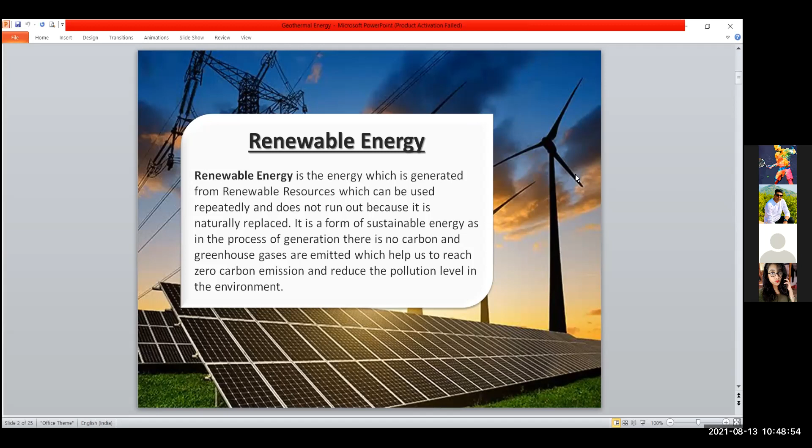Now, the question is why renewable energy? Renewable energy is the need of the future as we all know huge amounts of carbon oxides are emitted into the environment during the process of generation of electricity, causing a misbalance in the biosphere which results in climate change and nature degradation. So it is needed to switch over to a technology that helps us reduce these carbon emissions, and this is only possible with the adaptation of renewable energy over traditional carbon-based energy generation methods. It also helps us reduce dependency on fossil fuels.

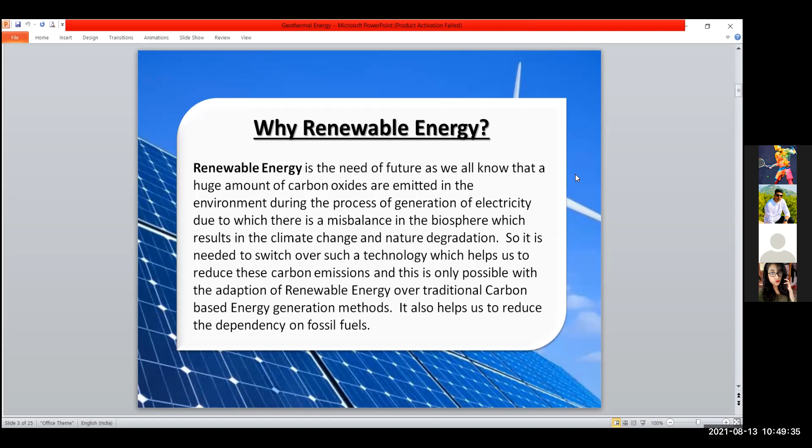Now, types of renewable energy will be carried by our teammate, Srigorai.

Good morning, sir. My topic is types of renewable energy, solar energy. Solar energy is a transformation of heat, energy that comes from the sun. Solar energy is radiant light and heat from the sun that is harnessed using a range of evolving technologies such as solar heating, photovoltaic, and solar thermal energy to generate electricity. It is utilized by many means like solar street lights, solar cells, solar cookers, which convert solar energy into desired forms like heat and electricity.

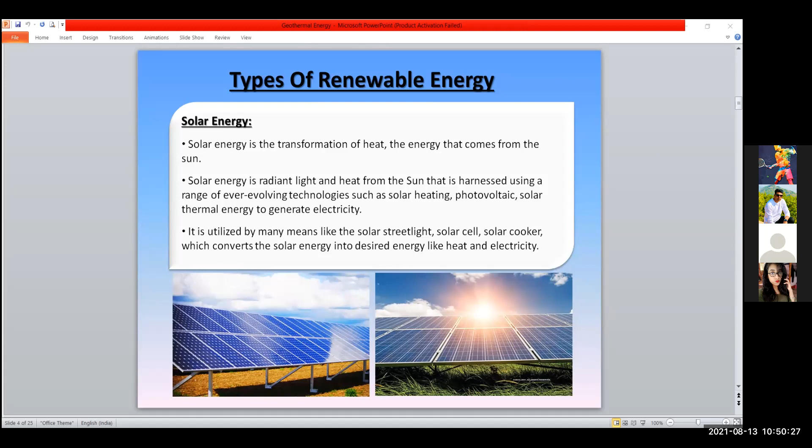Next is wind energy. Wind energy describes the process by which wind is used to generate electricity. Wind turbines convert the kinetic energy in wind into mechanical power. There are certain places in the world where wind intensity is high, providing an opportunity to set up windmills having a turbine to generate electricity.

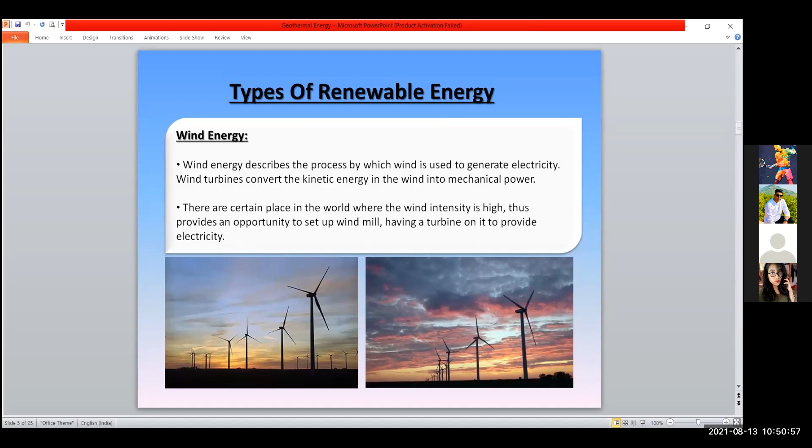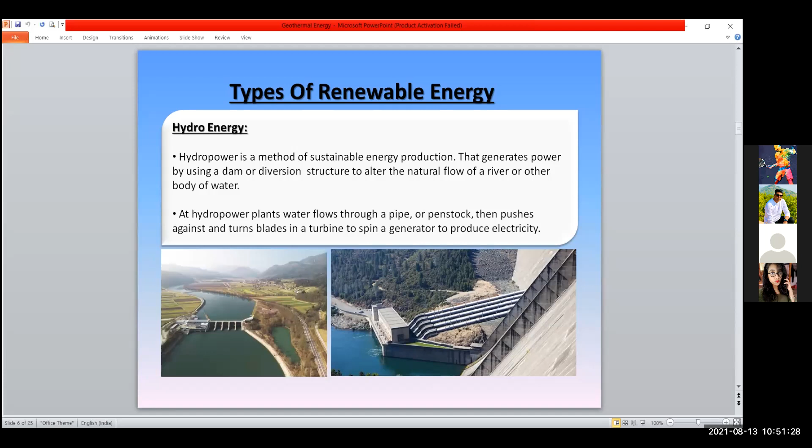Next is hydropower energy. Hydropower is a method of sustainable energy production that generates power by using a dam or diversion structure to alter the natural flow of a river or other body of water. At hydropower plants, water flows through a pipe or penstock that pushes against and turns blades in a turbine to spin a generator and produce electricity.

Next is geothermal energy. Geothermal energy is heat derived from the subsurface of the earth; water and steam carry the geothermal energy to the earth's surface. Depending on its characteristics, geothermal energy can be used for heating and cooling, or be harnessed to generate clean electricity.

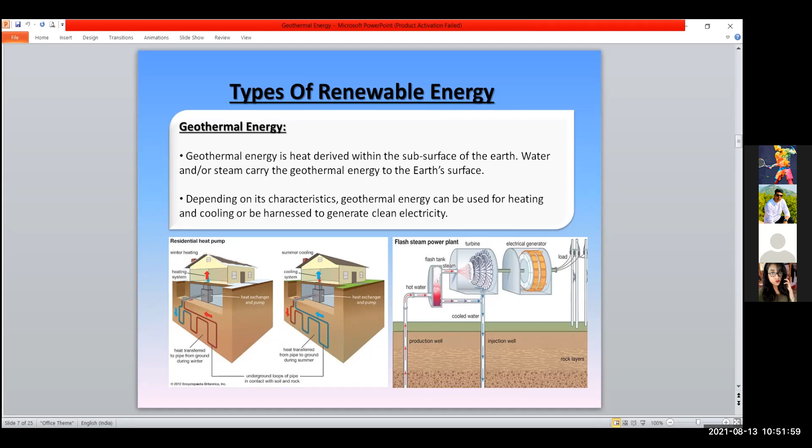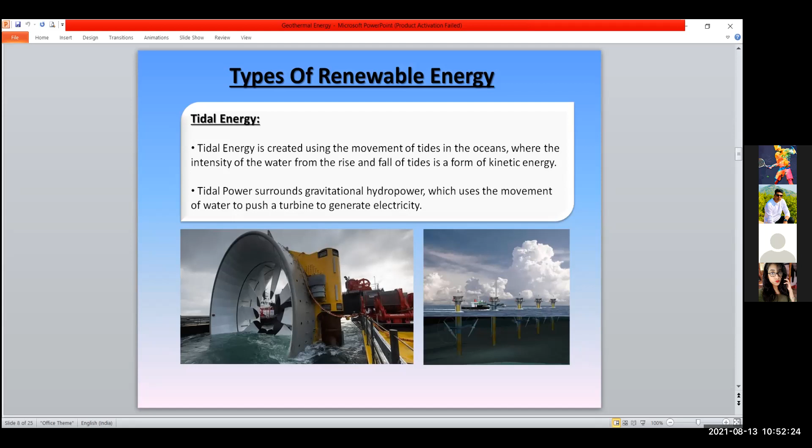Next is tidal energy. Tidal energy is created using the movement of tides in the oceans, where the intensity of water from the rise and fall of tides is a form of kinetic energy. Tidal power surrounds gravitational hydropower, which uses the movement of water to push a turbine to generate energy.

Next is biomass energy. Biomass contains stored chemical energy from the sun. Plants produce biomass through photosynthesis. Biomass can be burned directly for heat or converted into renewable liquid or gaseous fuels through various processes. Electricity generation from biomass in most cases is produced by direct combustion. Biomass is burned in a boiler to produce high pressure steam. This steam flows over a series of turbine blades, causing them to rotate, and the rotation of the turbine drives the generator to produce electricity.

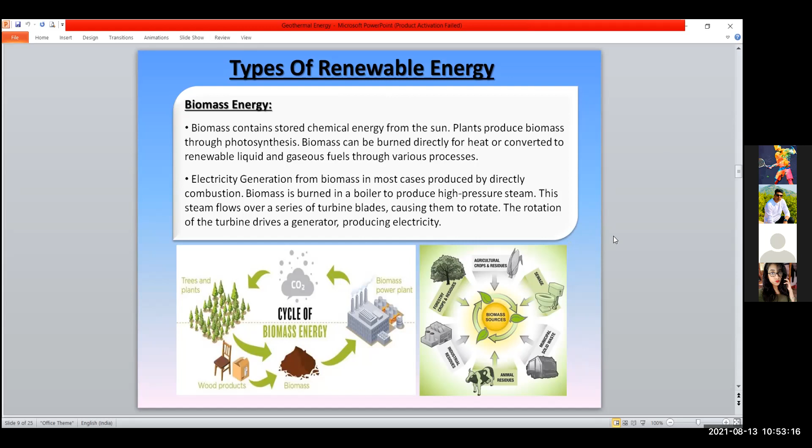Now next, again, we come to geothermal energy. Geothermal energy is an inexhaustible source of energy as it is available from the earth's crust. It is a renewable energy source that doesn't need any fuel to generate electricity, and the emissions connected with geothermal energy are very low and negligible compared to emissions from burning fossil fuels. Geothermal energy is gaining importance as an alternate source of energy.

India's power production is based on coal due to the availability of huge coal reserves in our country. Excessive use of these fossil fuels will have a deteriorating effect on the quality of human life. This is the time to launch geothermal energy resource programs in a big way to implement clean energy generation. Our country has enormous resources lying untapped, so we have to know the technology sources to generate power and support various industries using geothermal energy. There is more than one type of geothermal energy: one is low temperature water, and the other is high temperature resources.

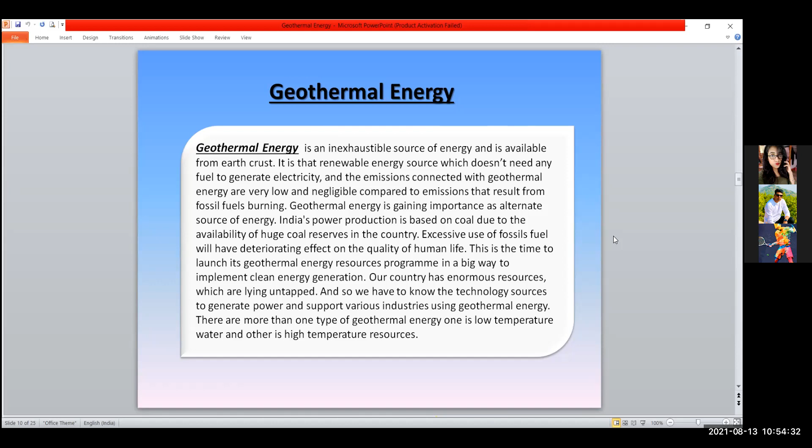Now, some brief history about geothermal energy. The use of Earth's internal crust heat as an energy source began in the early period of the 20th century. Electricity was generated for the first time from geothermal steam in Italy in 1904.

The spread of the use of geothermal energy to other parts of the world had been rather slow during the first half of the 20th century, mostly confined to Italy. The utilization of this alternate source of energy has increased rapidly during the last 4 decades. Development of geothermal energy registered the maximum growth rate of 22.5% per 5 years between 1980 to 1990, and a slightly slower rate of 16.7% between 1990 to 2000. Much progress in utilizing this very potential source of energy has been made during recent years.

Now, the factors affecting geothermal resources vary widely from one location to another, depending on the temperature and depth of the resource, the rock chemistry, and the abundance of groundwater.

Geothermal resources are predominantly of two types: high temperature, such as found in volcanic regions and island chains, and moderate to low temperature, usually found extensively in most continental areas. The type of geothermal resource determines the method of utilization.

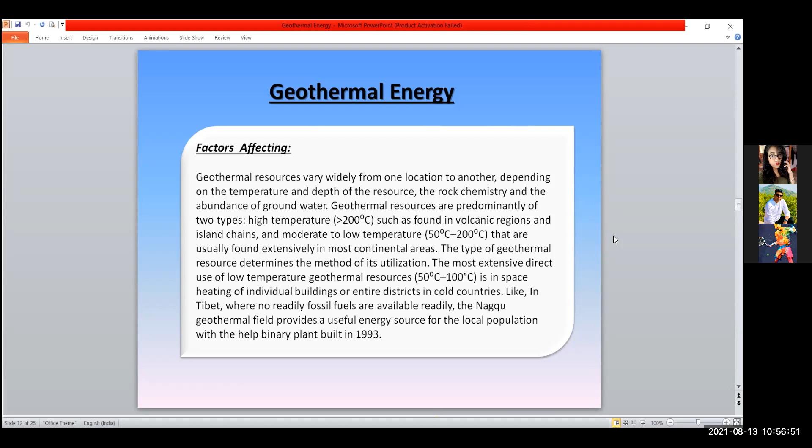In the Indian scenario of geothermal energy, it is observed that most places in India do not have sufficient energy sources and hence are dependent on other parts of the country. So geothermal energy may be one of the viable solutions for these states and provinces.

It is estimated that nearly 400 thermal springs of low to medium enthalpy exist in India, distributed in seven geothermal provinces. The surface temperature of these thermal springs varies in the range of 47 degrees Celsius to 98 degrees Celsius, and the estimated amount of energy that can be generated from these springs is about 10,000 megawatts.

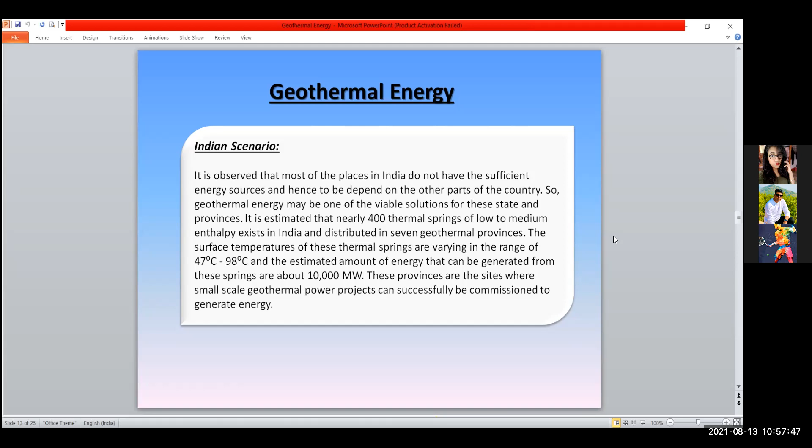These provinces are the sites where small-scale geothermal power plants can successfully be commissioned to generate energy. Some of the geothermal provinces in India are the Northeastern Himalayan province, Cambay province, West Coast province, Sonata province, Bakreswar province, Godavari province, and the Barren Island.

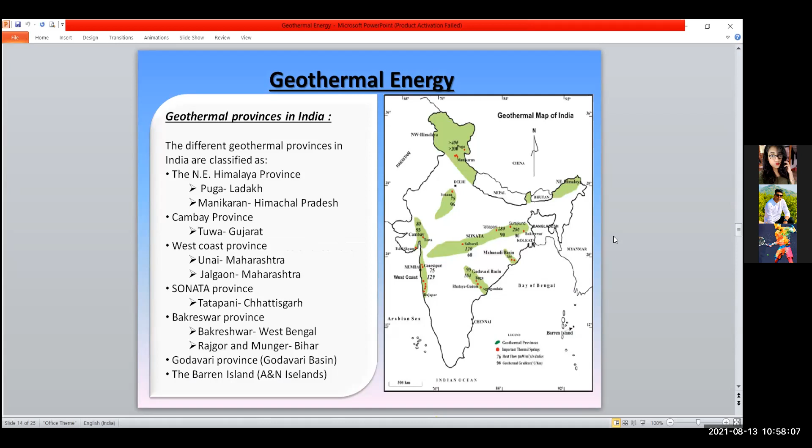Production process of geothermal energy. To produce geothermal generated electricity, wells 1.6 kilometers deep or more are drilled into the underground reservoirs. The geothermal energy can be used to produce electricity through steam, or hot water can directly be fed into the power plants for production of electricity.

These wells tap steam and hot water to drive the turbines. The turbines in turn are linked to electricity generators.

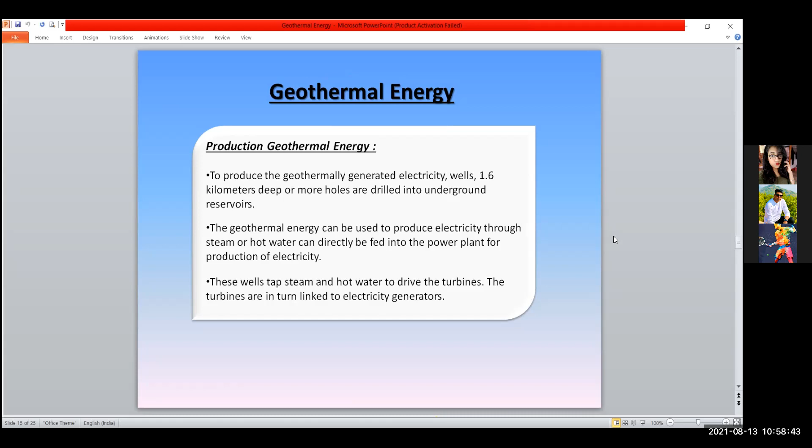The components of a geothermal power plant: the production well. As in the figure, we see that a well is dug in the ground from where hot steam comes. Production wells are used to extract the geothermal fluid, which is hot water and steam, brought to the surface and directly connected by pipe to the power plant.

The second part is the power plant. This comprises the turbine, where the geothermal fluid rotates the turbine blades and produces electricity, as in general steam turbines. Then there is the injection well, which helps inject the water back into the ground. It is used to inject the used geothermal fluid, feeding it back into the reservoir without evacuating the earth's inner crust.

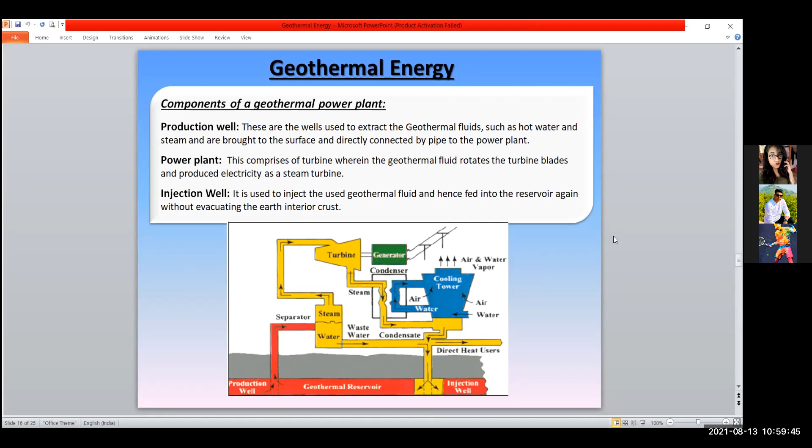Now the types of geothermal power plant will be taken over by our teammate Vikas.

Good morning, everyone. My topic is types of geothermal power plant. There are three types of geothermal power plant: dry steam plant, flash steam plant, and binary steam plant. In the dry steam plant, it takes the steam out of the fracture in the ground and uses it directly to drive a turbine. In this, the amount of water with the steam is very little, so that steam is used directly to run the turbine.

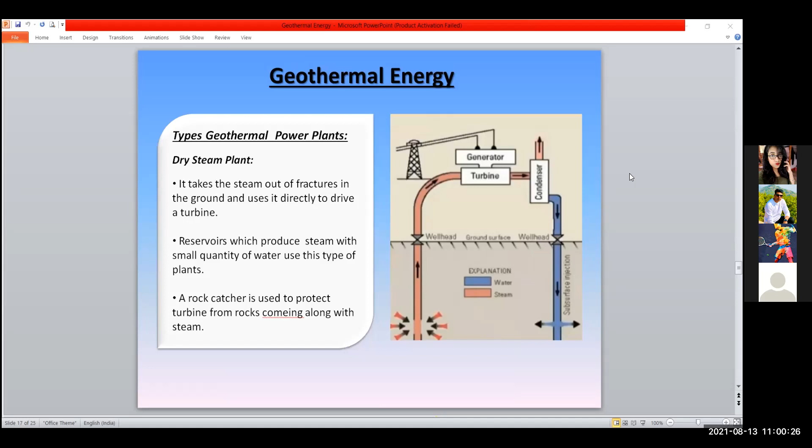Hello. In the flash steam plant,

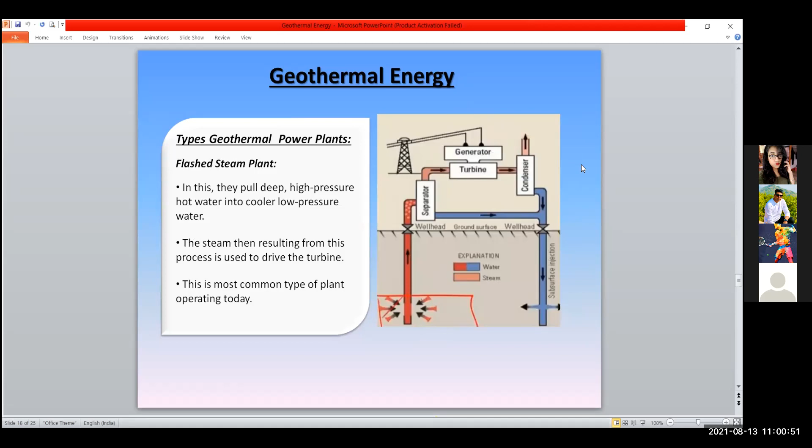Hello. In this, they pull deep high pressure hot water into cooler low pressure water. The amount of water is more than the dry steam plant. Therefore, a separator is used to separate the water from steam. This is the most used plant nowadays.

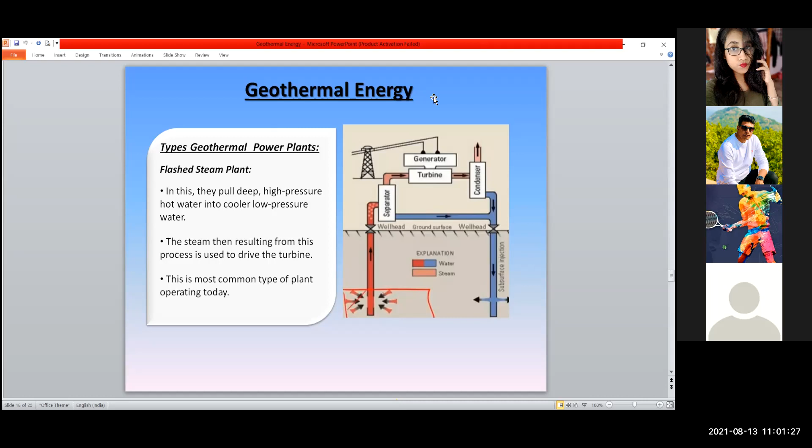Rahul, change this slide. In the binary power plant,

Rahul, I think he got disconnected.

Let me carry on. Binary power plants. In this, geothermal water is passed through the heat exchanger where its heat is transferred to the secondary liquid.

Liquids having lower boiling points are used as secondary liquids, such as isobutane, isopentane, and ammonia water mixture.

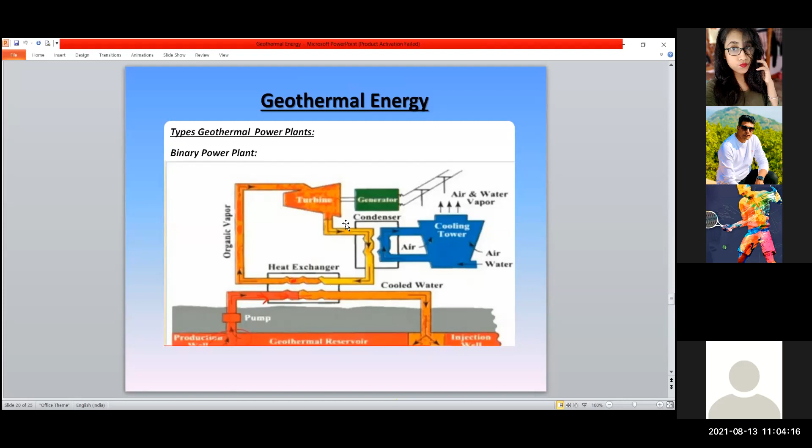Now, India's first geothermal power plant. The details are shared by our teammate Rishika.

Good morning, everyone. India's first geothermal power plant. On 7th of February 2021, a tripartite agreement between the UT of Ladakh,

LAHDC Leh, and ONGC was made to set up India's first geothermal energy-based plant in Puga, Leh. It would help tap the potential of natural geysers touching the Puga area, which is 170 kilometers east of Leh.

It would provide round the clock power supply in the territory and would lead to a carbon neutral Ladakh.

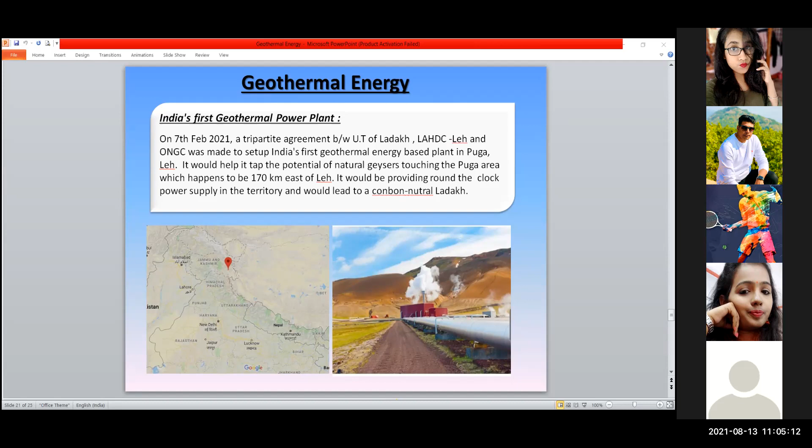The phases in which the first geothermal power plant will be undertaken by ONGC: First phase, ONGC would drill up to 500 meters to tap steam and hot sulfur water that spews out of geysers. It would help in running the power plant up to a capacity of 1 megawatt.

In the second phase, the drilling would be a bit deeper to explore the potential of the thermal reservoir. In the third phase, a commercial plant will be set up with an estimated power supply of 250 megawatt.

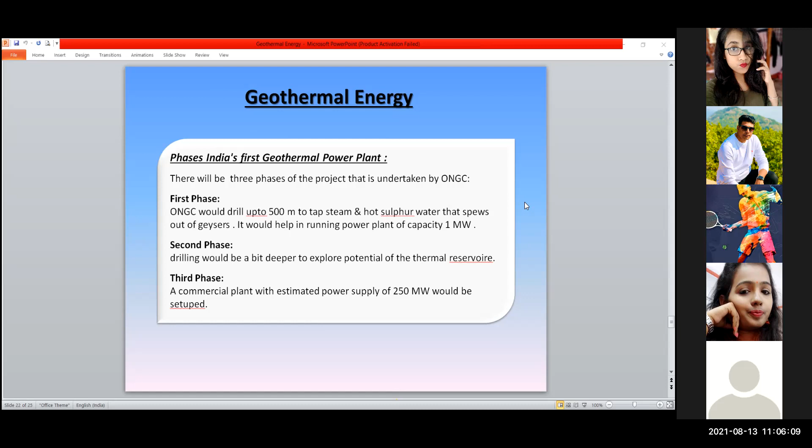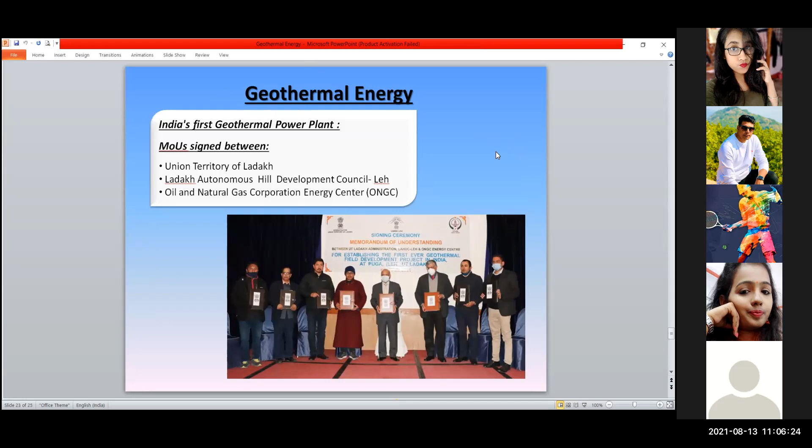India's first geothermal power plant. The MOUs are signed between the Union Territory of Ladakh, Ladakh Autonomous Hill Development Council Leh, Oil and Natural Gas Corporation Energy Center.

Facts about geothermal energy: Geothermal energy's largest producer is the United States. It is also generated in more than 20 countries. The largest geothermal development in the world, the Geysers, is north of San Francisco in California, US.

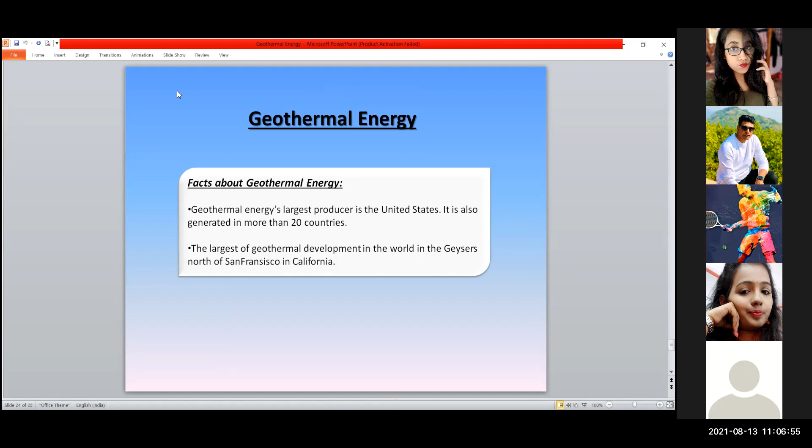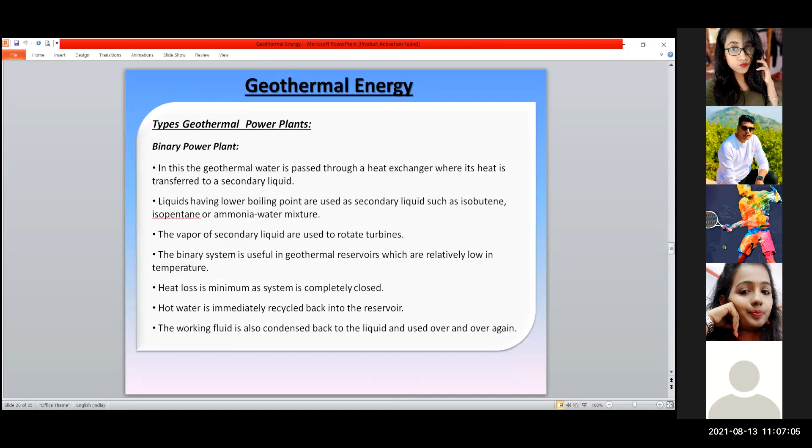It is being done. Okay. So you four are only there. So

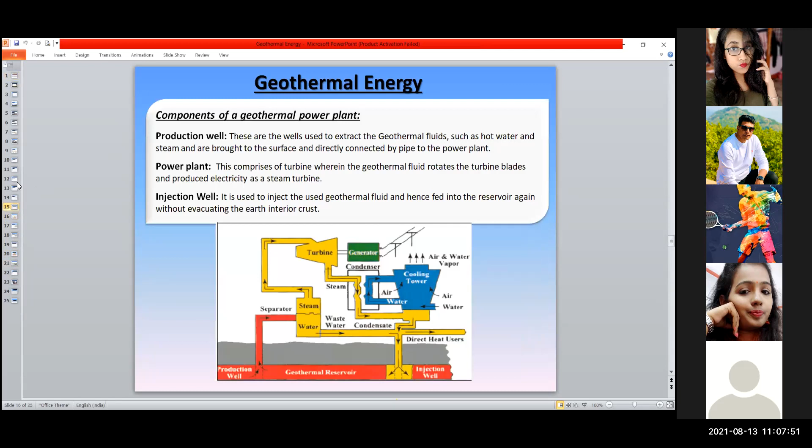What was the slide number? I forgot the slide number.

In Ladakh, do you know how many hot springs are there? Have you listed that? I was curious to know that.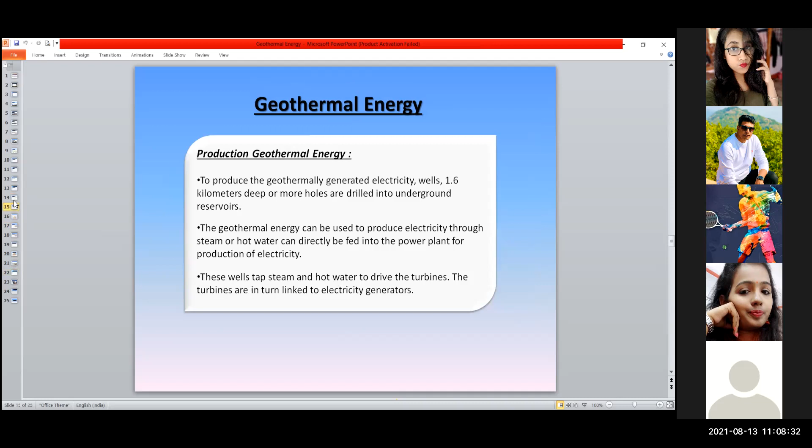So actually, that is the reason in this northwestern Himalaya and northeastern Himalayas combined, there are many areas, but the important areas are Puga and Manikaran in Himachal Pradesh. Puga in Ladakh, Manikaran in Himachal Pradesh, which have a capacity of greater than 400 and greater than 200 megawatt to generate if it is utilized properly.

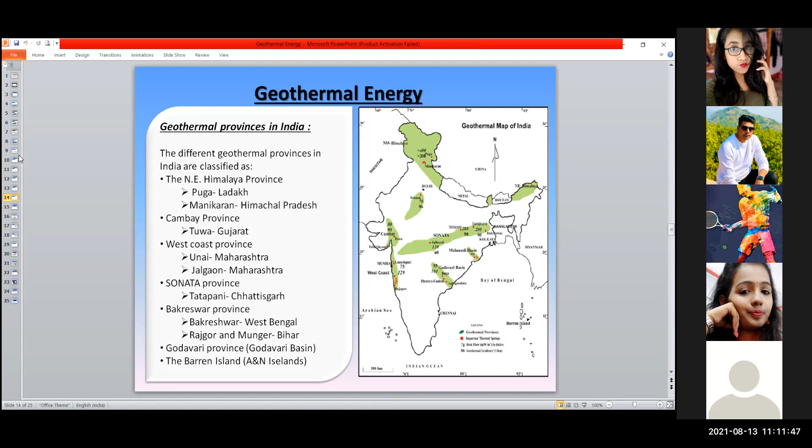With the same system, no separate technique is needed, as we know that during winters the ground's inner surface is hotter, and during summers the inner surface is cooler than the surrounding atmosphere. So it is very useful in cold countries, as they consume a huge amount of energy for heating their houses during most of the year. This new technology is mainly used in Canadian regions.

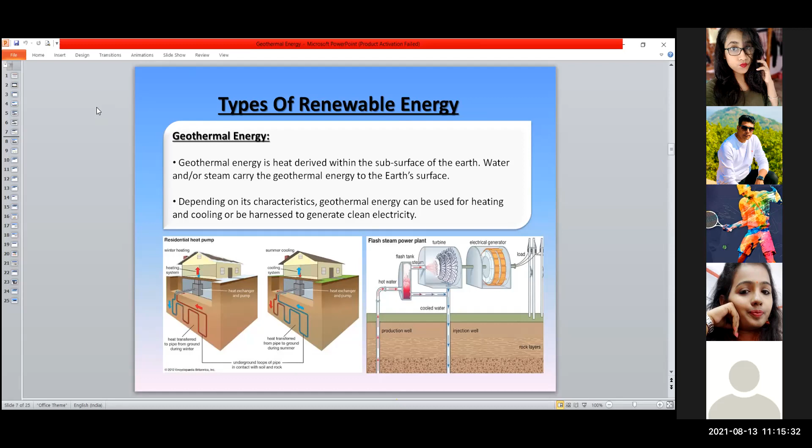Okay, so in the types you have shown, what are the types of geothermal plants we use? Generally we use flash steam plants, as they have less complexity. But there are three types: dry steam plants, in which steam is directly used to run the turbines, mainly placed in higher temperature geothermal plants.

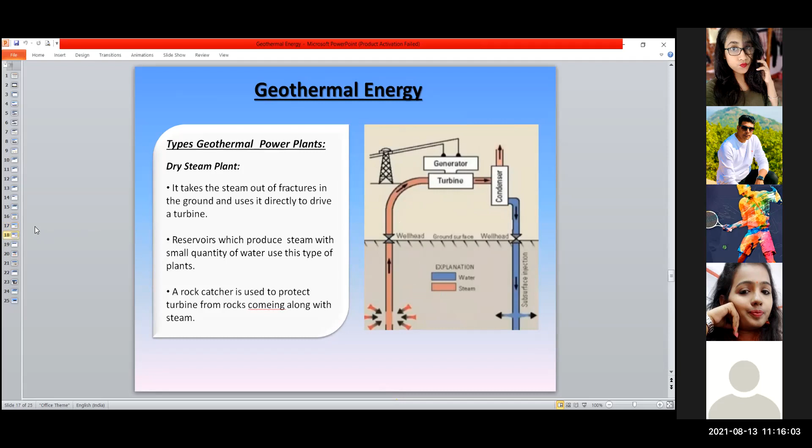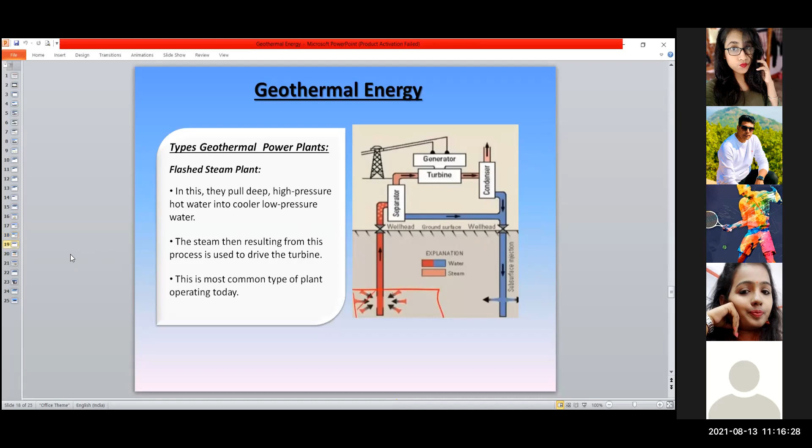The flash steam plant is used where there is a medium type of temperature, as hot springs are condensed in a separator and again injected to the ground surface and used to run the turbine. The newer technique is the binary power plant, in which we use a heat exchanger to run the turbine, meaning a secondary liquid with a lower boiling point is used to run the turbines. So currently there are three types of plants in process.

In that part, you told about this binary type. Can we conclude in another format the types of thermal systems on the basis of construction? Yeah.

Some new techniques are also coming, like in areas where there are not big reservoirs underground near the earth surface. So they are drilling vertically to some extent, then drilling horizontally and spreading a chain of pipes to gain the heat from that surface, not the steam actually. They are directly hitting the secondary liquid under the earth surface.

There the heat exchanger is within the ground, and then utilizing it for running the turbine. They are making newer techniques which are not so explored nowadays, but it will be helpful for the geothermal industry in the future. These are also classified based on closed geothermal systems and open geothermal systems.

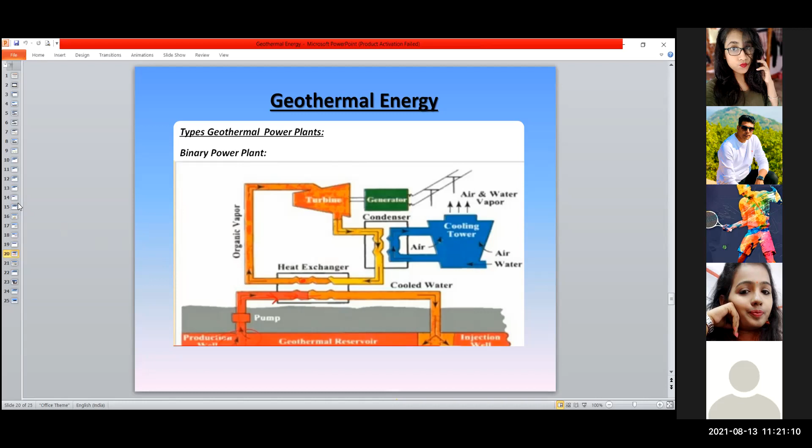I think you have shown in the starting period the few factors to be known before deciding how and where to install the geothermal system. Is there a slide for that? Yes sir, the factors that are to be considered.

It depends on the temperature and depth of the resource, meaning the pond area located under the earth crust that we have to consider, along with the depth that we have to drill. If the depth is too large, the process will be very tough, and we also have to know the rock chemistry, as if it's a very big rock with no cracks, it is difficult, and it can also result in earthquake scenarios as we break the big crust.

The geology is another factor to understand, the composition and properties of soil and rock, which could affect the heat transfer process, so we have to consider that part.